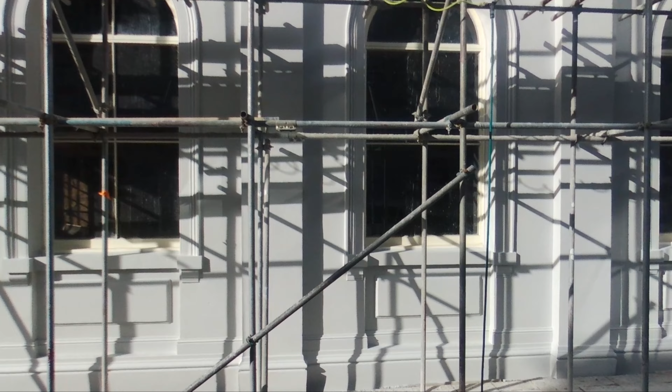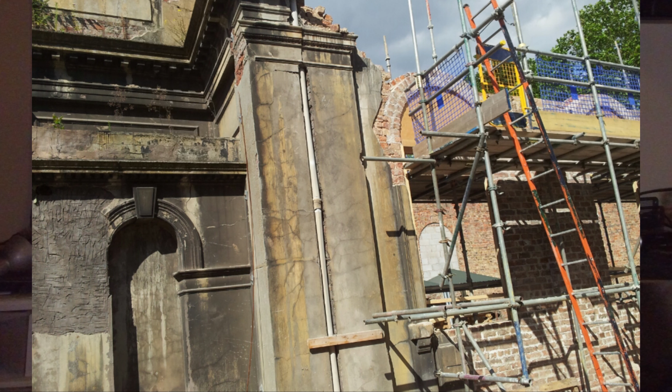First thing you need to do is go to site and take a good look around. Take some photographs, have a look at the mouldings, see what's there, look at the details. Most of them are quite repetitive on an exterior of a building, so if there's something you can take examples of, windows or crown mouldings, plinths, try and take as much records of them as you can. Best to take a sketchbook and just make a quick sketch of what you see, what's there, what's missing, what you're there to actually achieve, and a bit more information about the building.

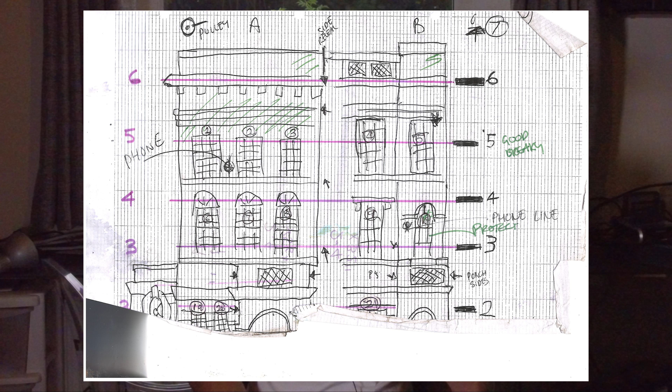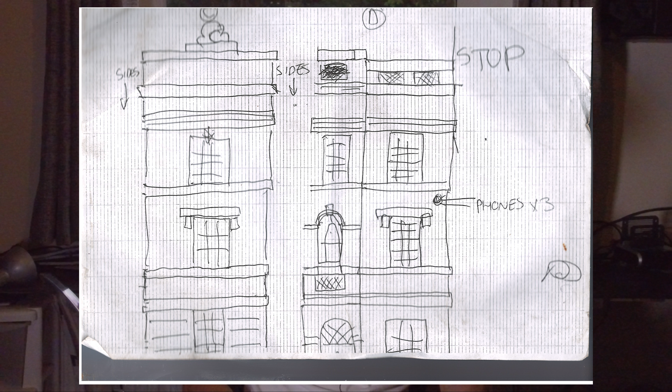You can see here we've made a rough sketch. It's showing the basic shape. It's a terraced kind of looking building. It's showing some of the different courses of stone and different courses of stucco work. Wrote some notes along the side and also indicated where the cracks and some of the vegetation are growing from. Keep hold of your notes, make a copy of them with your phone, take a picture. Keep hold of them because you can always refer back at a later stage.

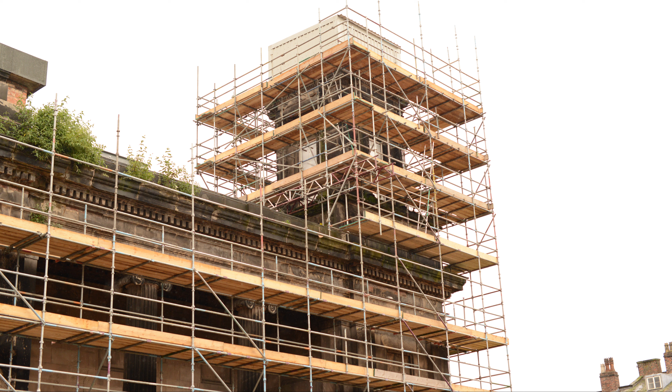These projects can go on for a long time, so if you notice that there's an issue with a downspout that's causing damp, write that down, mark it out on your drawing, and keep the drawings right through the project in a file. Look into the history of the building and find out who built the building, what year it was built. Try and find out as much information as you can, any alterations that have happened, or modern interventions, cement and paint, what coatings are on now, what's the expected finish to be.

We looked back through a long history in our jobs and we try to make sure we get the materials analysed. We found old text in a poem that indicated the finish on a building in Liverpool that we're really glad we found. That proved something for us once. But you need to really know exactly what era it is you're looking at, what kind of architectural details, what materials were used, going to help you with the matching and the repairs. Any building that's been modernised and changed, had coatings applied, you need to know what era you're matching to, because either you're putting it back to the original, or you're going back to another period in time when it was modernised.

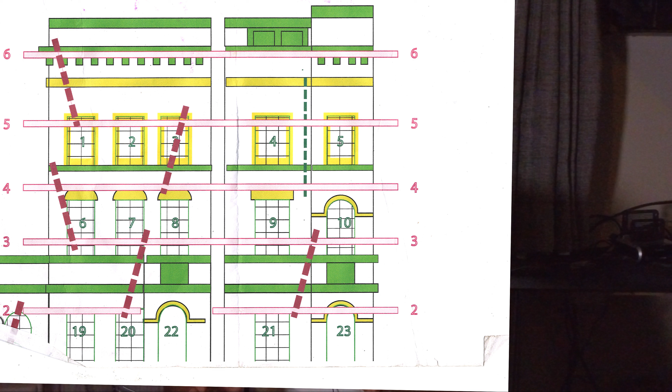You need to make a plan. You need to start getting a detailed plan. Copy across your old notes, your old plans. Start to do things to scale, take some real scale drawings. Notice the different profiles and maybe even start to number them at this stage. You need to work out what's new and what's missing, what's a previous repair. Look out for drip members, any other architectural details, any modern interventions.

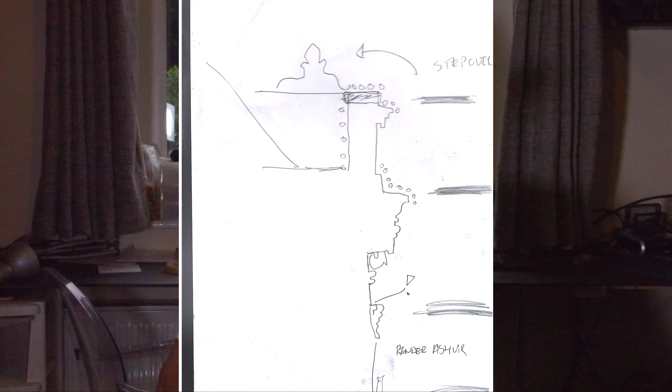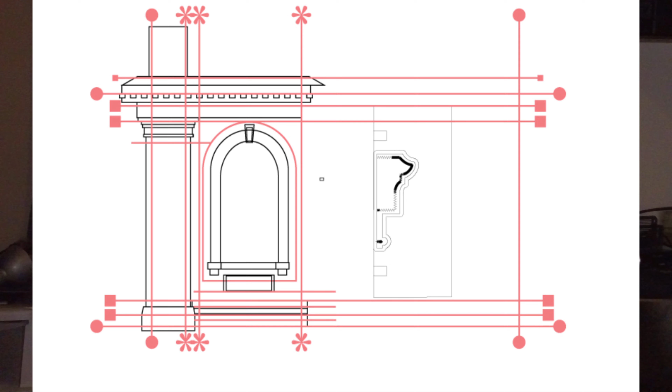Be as clear as you can with your plan. Date it and keep it in your folder. Transfer any notes from your original plans over to these plans and keep them all in order in a file. You're going to refer back to these. Projects change all the time. From the plan and following some of the later videos, you'll have to work out where your screeds and your rules are going to be set. These need to be consistent, they need to be marked on the plan.

If you can work to brick joints, that's the safest way. If you're hacking off back to the old, you can see the existing mortar joints and you're working everything to brick joints, you can knock nails, pins, whenever you need into them. Easy to measure, you don't need a tape measure on site.

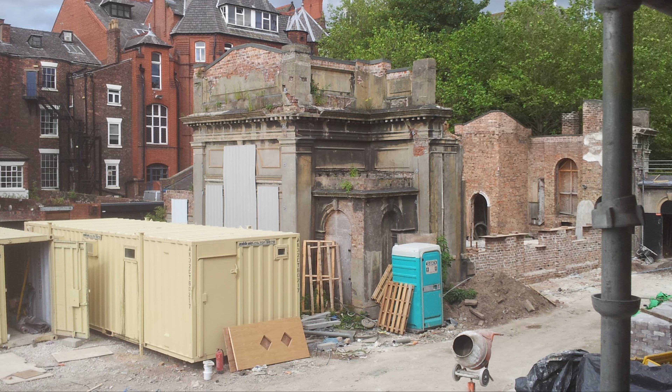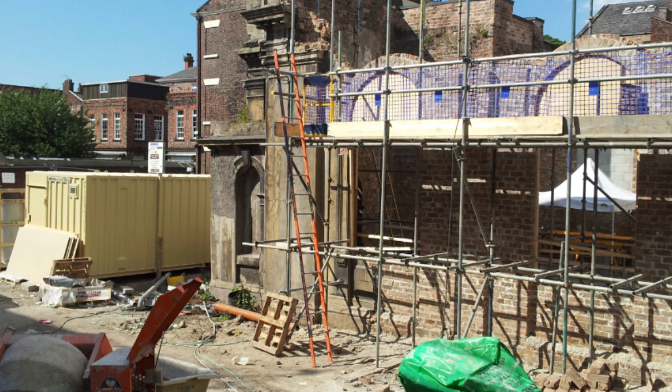The Sunday School, the 18th century building in Liverpool, the former Sunday School in Rodney Street, we were lucky enough to be working on a building next door. We were given the opportunity to record profiles and take our notes and make our initial assessments 2 years before we actually started that building. It had to be rebuilt in reclaimed brick and lime mortar, and that was a further 18 months before we got onto site, which was nice. We got involved in that a little bit as well, with setting it out and stuff. But had we not been in, made a plan, took measurements, it would have made our job a lot more difficult trying to put it back together. There were 36 profiles on that one.

Recording profiles, there are several ways to do it. A preferred method to us, if it's a building particularly of this condition that we're able to take a sample, is we'll physically cut a piece of the sample and a small amount of substrate, the brickwork, away. We'll take a thin slice of that and we'll put it into a digital scanner, scan it into a computer, then we'll trace around the object.

It gives us a better chance to magnify the image and look at some of the makeup, the aggregate size and the thicknesses, and it means that we can then make a clear copy of the profile and cut that out of our zinc using a CNC machine. It just makes our workflow a lot easier. I'll show you some of that. Whether you're making your copies digital or you're tracing them using a tracing method, you've got a copy just to make sure. It just keeps the process streamlined. You don't want anything to slow you down in this. It's slow enough.